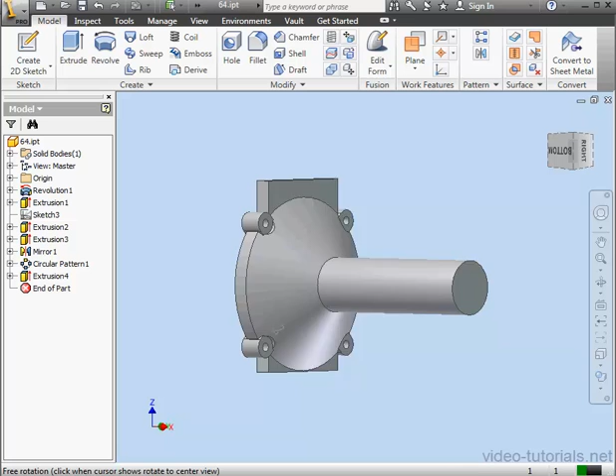First, hold down the Shift key on your keyboard and your middle mouse button or your mouse wheel to rotate the model. Now let's right-click and insert a new sketch on this face. I'm going to drop a rectangle here, something like this. Now activate the line command. Let's create a line from this point to this midpoint. Apply a horizontal relation.

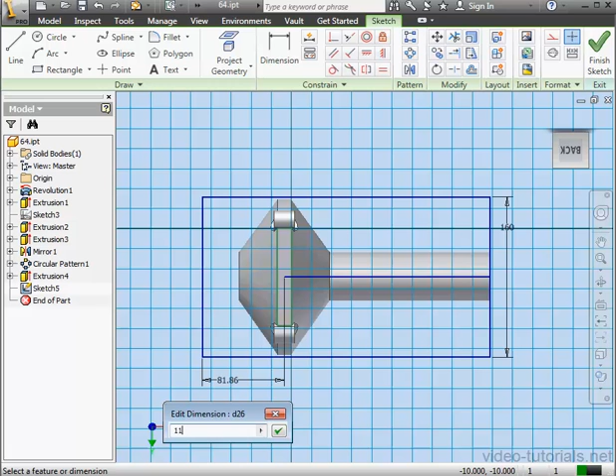Select the line. Apply the Project Geometry tool. And let's select this edge. Let's apply a collinear relation. We'll select this line and this line. Now some dimensions. This side will make 160 millimeters. Okay. And the distance between this point and this line, I will make 110 millimeters. Lastly, let's convert this line to construction geometry and finish the sketch.

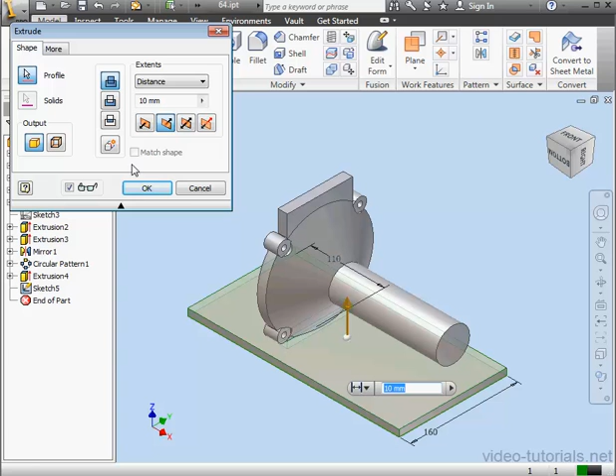Let's take an isometric view and activate the Extrude command. Select the profile to extrude. Let's change the direction of the extrusion. Make it 10 millimeters in depth. And OK. Let's insert a second sketch now on the XY plane. Right-click, New Sketch. Let me just zoom in a bit. And let's go back to wireframe view. It's just easier to sketch that way.

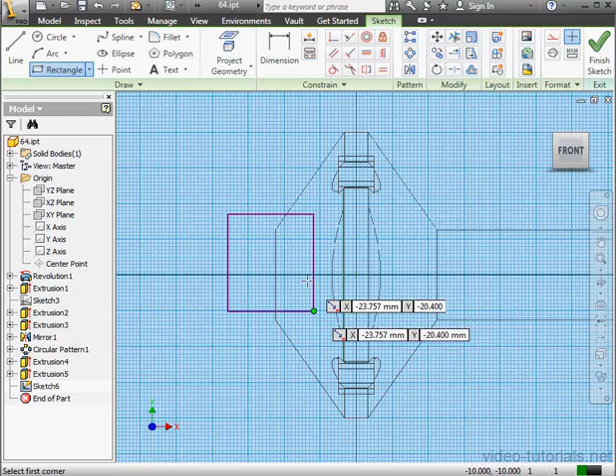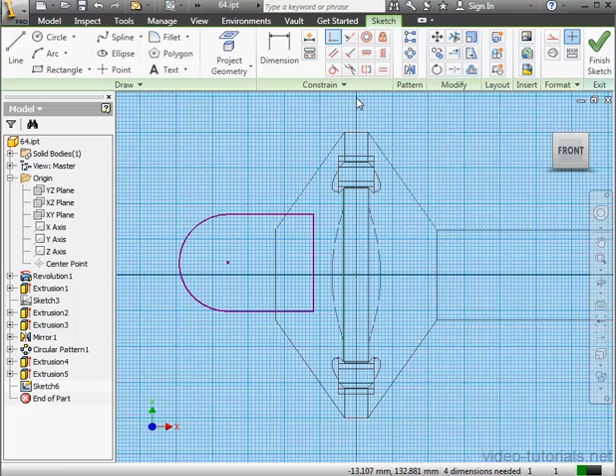Activate Project Geometry. Let's project this edge. Now activate the Rectangle tool, and let's drop a rectangle about here. Next, a 3-point arc. First point, second point. For the third point, I'll left-click when I see the tangency glyph. There we go. Press Escape to exit the tool, and let's delete this line. Next, I'll place a coincident constraint between this point and this point.

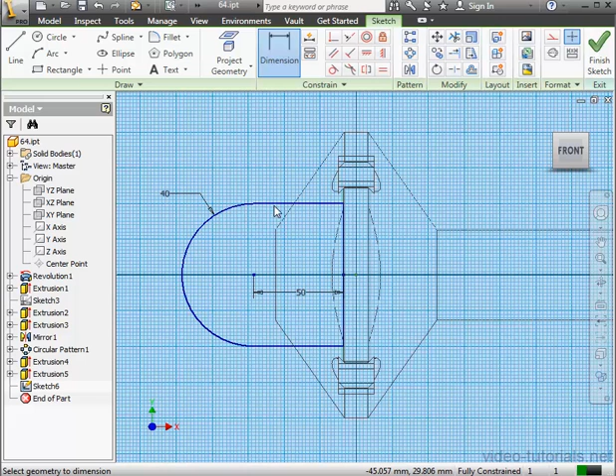And let's apply dimensions between this point and this point. Let's say 50 millimeters, OK. Let's dimension the radius of this arc at 40 millimeters, OK. Our sketch is fully constrained, so let's click Finish Sketch. Activate the Extrude command. Our profile is pre-selected. Let's just take a different view. It'll be a symmetric extrusion, 160 millimeters in depth. And let's click OK.

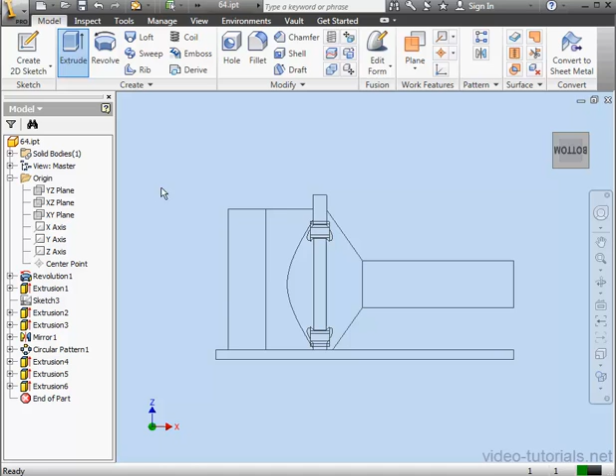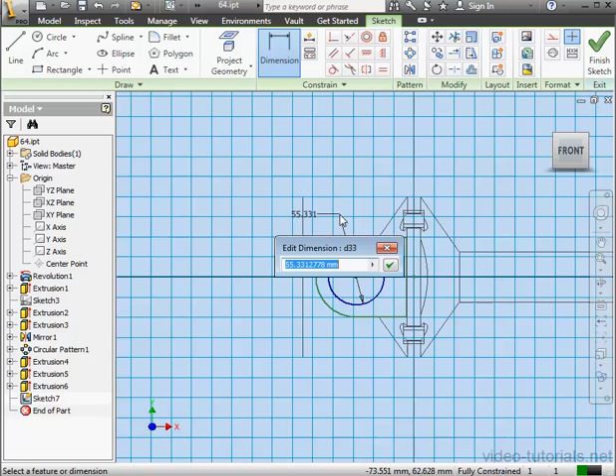Let's take an isometric view. Right-click on this face, New Sketch, and activate the Circle command. Right now we're creating the housing for the top barrel. Let's apply a dimension. We'll make this diameter 50 millimeters. OK. Let's finish our sketch and activate the Extrude command. Select our profile, make it a 20 millimeter extrusion. Let's apply a taper on the More tab, -5 degrees, and let's click OK.

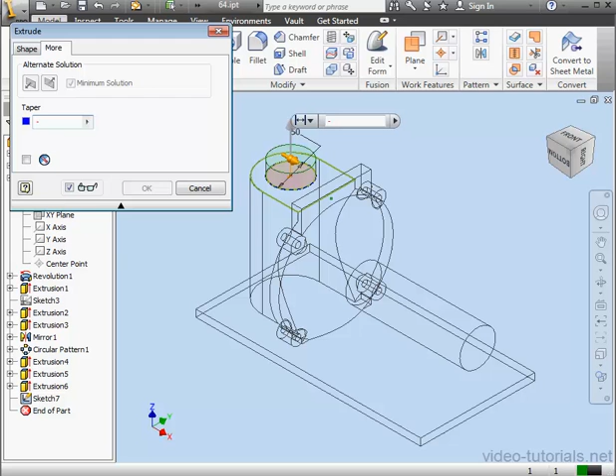All right, let's take a Shaded with Edges view so we can better see what we've done. And this concludes our third tutorial on the gear housing.